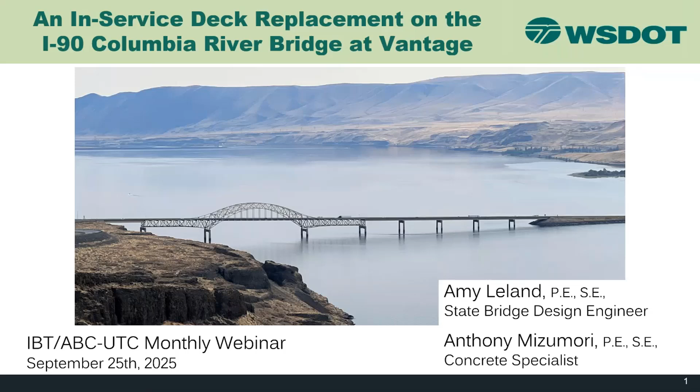Well, welcome. Thank you all for coming today. I appreciate it. I'm Amy Leland, as Kathy mentioned, and I am the State Bridge Design Engineer for Washington State Department of Transportation. I'm here along with Anthony Mizumori, who's one of our senior design engineers and our concrete specialist. We are here today to talk about this project, the Vantage River Bridge Deck Replacement Project.

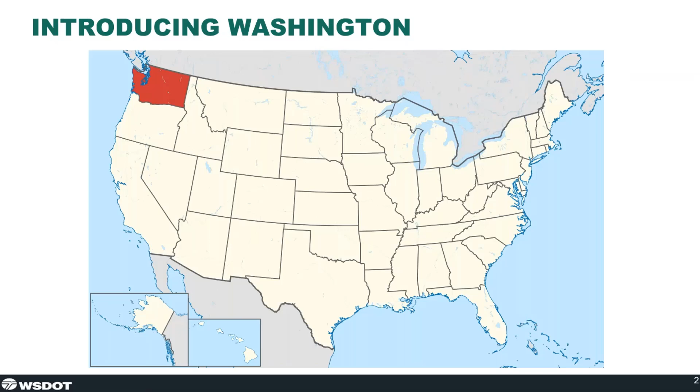So a little bit about Washington. Let's introduce Washington State. For those of you who do not know, we are located in the northwest corner of the continental US, as you can see here in red. For Washington State DOT, ourselves, we tend to design approximately 50% of our designs in-house. I know different states do it differently, but in Washington State, that's approximately our percentage that we do ourselves.

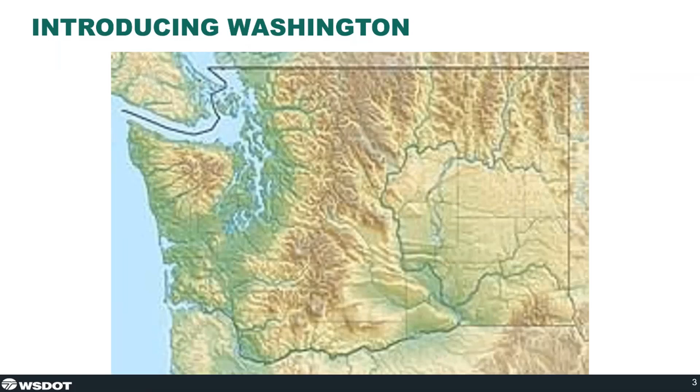Another figure of Washington State, this one you can kind of see some topography. What I want you to notice is that there is kind of a difference as you go from the west to the east part of the state. So here I drew in a little line and it kind of indicates the separation between west and eastern Washington. We have a lot more moisture on the west side, we have higher seismic on the west side, we have a lot more green on the west side. On the east side, it tends to be drier, a little bit more grassland and whatnot. So for those of us in Washington State, we tend to say we're from Western Washington or Eastern Washington.

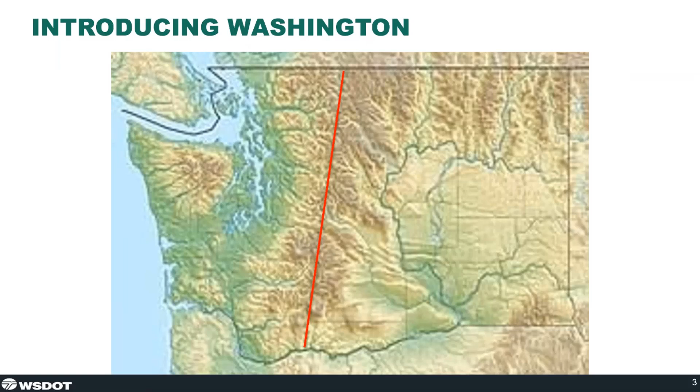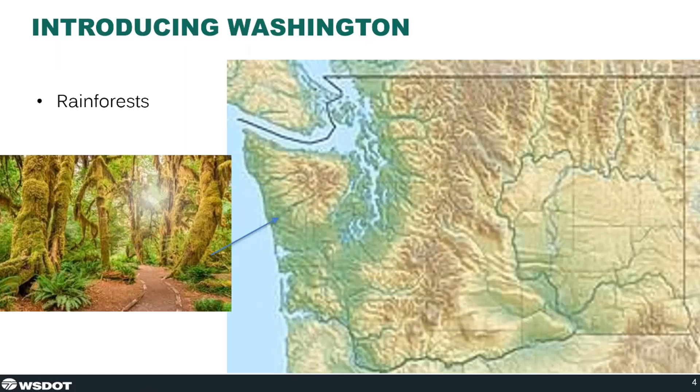Going more in depth in what we have, on the west side we have rainforest. You can see a picture here. We have a lot of moss on the trees. It's just a beautiful area. Then we have our mountains. We have a lot of mountains and mountain ranges.

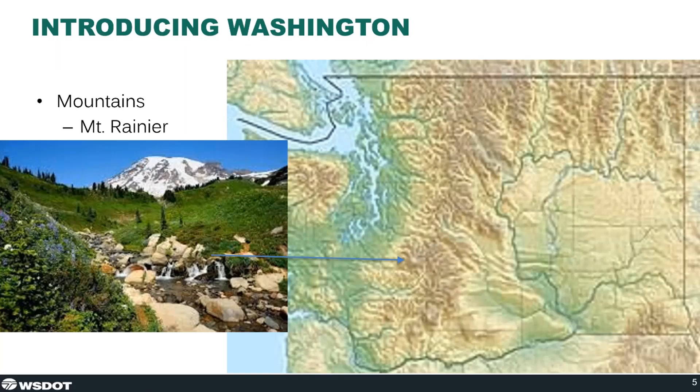On the east side of the state, we have a little bit drier arena. We have more farmlands, and we also have a lot of apple orchards. Washington is known for its apples.

Now let's get to the heart of this. We have bridges. In Washington state, there are approximately 7,700 bridges, and those are state-owned and local agency structures. 3,412 are owned by Washington State DOT. Our structures, we have 8.5% are in poor condition as of fiscal year 24.

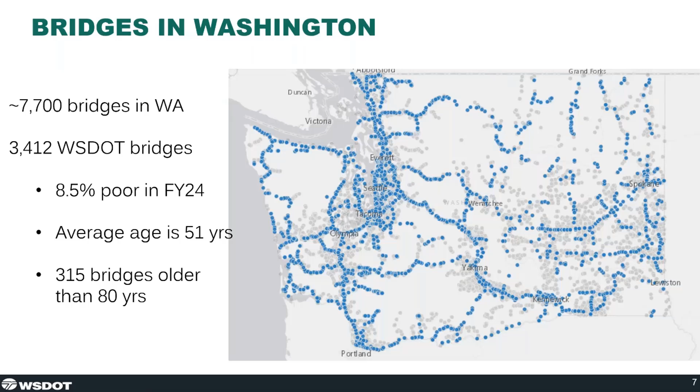The average age is 51 years. We have 315 bridges older than 80 years. I do want to point out that the bridge we are talking about is not in poor condition, it is in fair condition. Now let's talk about our bridge decks.

We have 72 of our bridges due for rehabilitation, meaning between 2 and 5% of the deck area is patched or spalled. We have 59 of our bridges past due, more than 5%, and 23 in contract for rehabilitation.

On the map to the right, you can see our main state routes, our corridors. Going from north to south is I-5, which extends all the way down into California. Going east-west, we have I-90, which starts in Seattle and goes all the way to the East Coast. The Vantage structure we're talking about today is near the middle of the state on our I-90 corridor, so it has a lot of traffic.

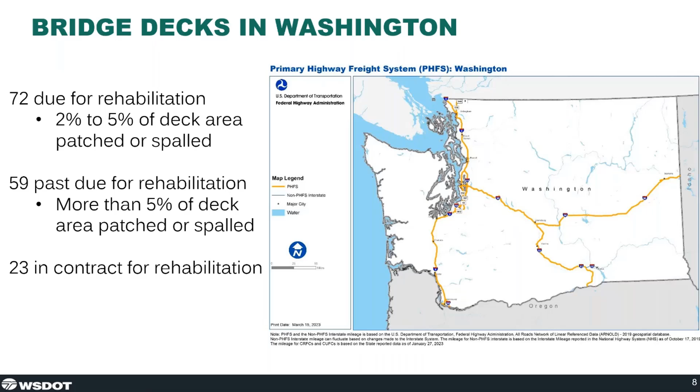Now I'm going to turn it over to Anthony so he can talk about the specifics on this particular project. Thanks, Amy. I'll get into the details of this deck replacement project, which is currently under construction. Here you can see the Columbia River Bridge at Vantage with a 520-foot tied arch main span and several plate girder approach spans off the side of this slide.

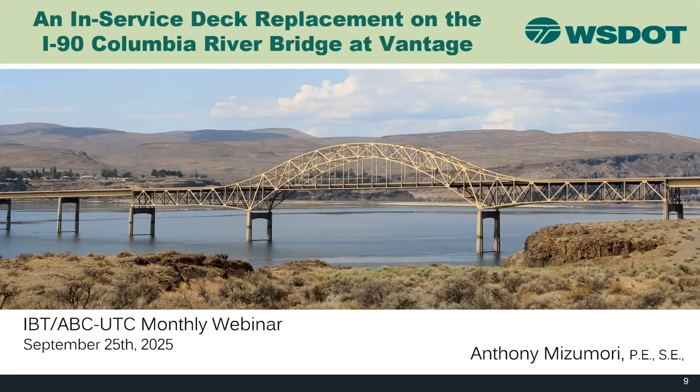So what I'm going to cover today is some of the history of the site and the bridge, as well as the existing conditions on the bridge deck. I'll talk about some of our project goals, and then go through several of the structural solutions that we developed along with construction photos.

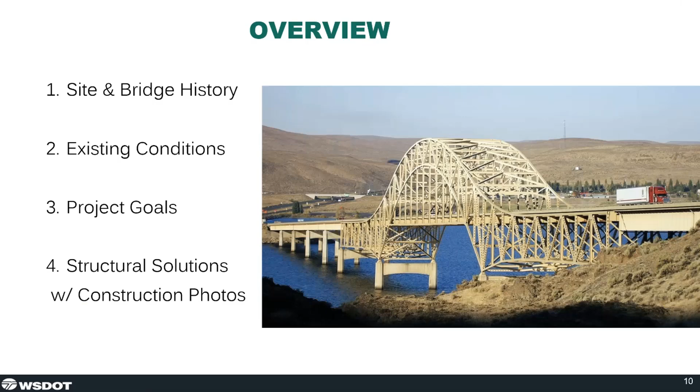The bridge location is circled here in the center of the state on I-90, as Amy mentioned. High ADT, very high truck percentages, and the two shortest detours at this location are both over 100 miles long. So it was not a good candidate for any sort of extended closure to lanes or the bridge entirely.

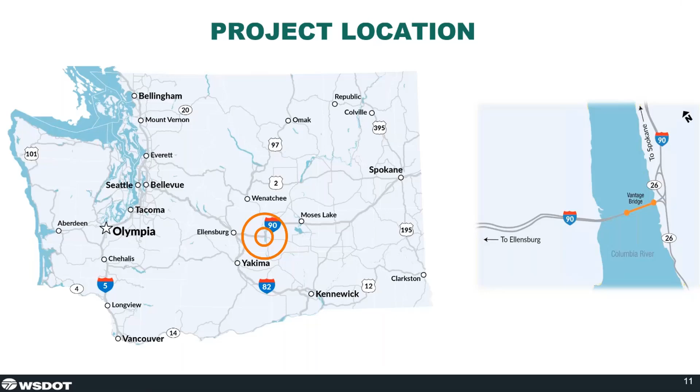Here are a couple photos from the first crossing at the site. In 1914, a ferry was put into service. It carried 2 cars, and it was quite dangerous. They learned quickly that you had to chain the wheels down to the deck in order to keep them on the ferry. 3 years later, in 1917, Washington State took over and operated this ferry.

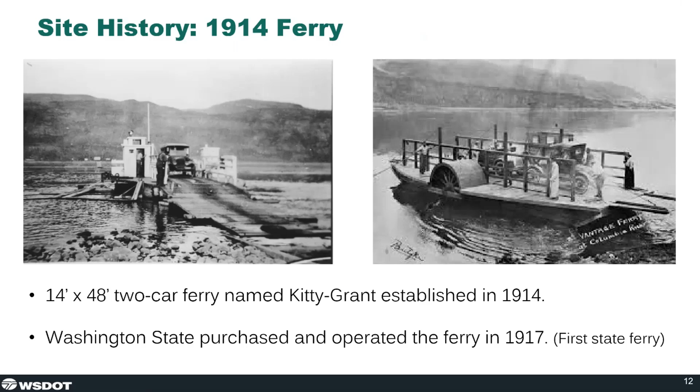So it was the first state ferry in Washington, and today Washington State owns and operates one of the largest ferry systems in the country. This photo shows the first bridge constructed at the site in 1927. It's a 2-lane bridge, 1,640-foot cantilever truss, and it was the 7th crossing over the Columbia River.

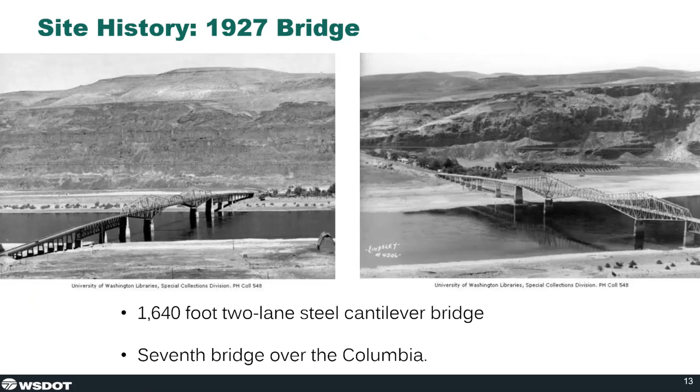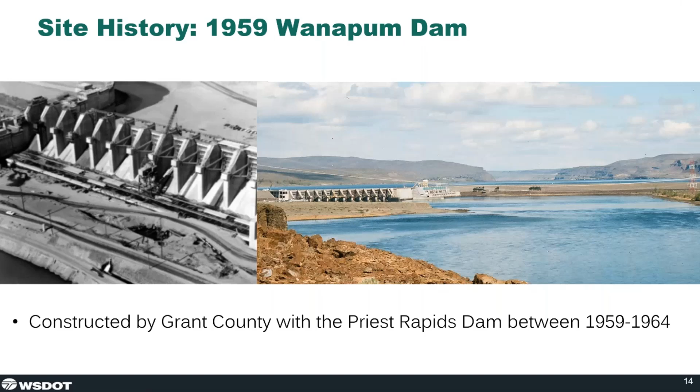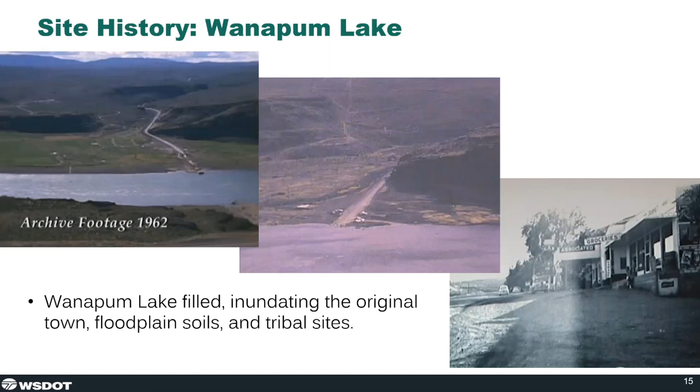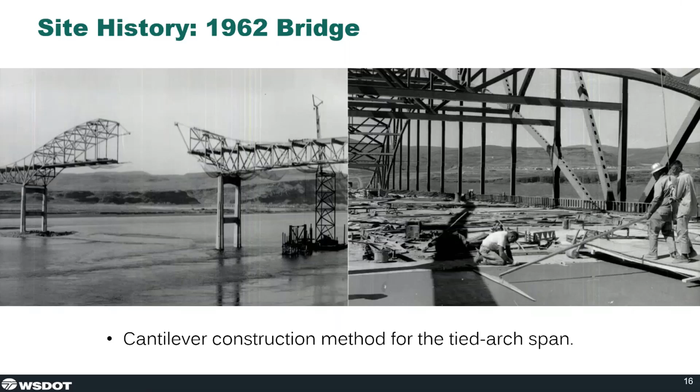The new bridge is under construction downstream, shown here in 1962. You can see the tied arch span being constructed using the cantilever construction method. The photo on the right shows some of the deck construction work on the cast in place deck. And here's a photo of the bridge shortly after it was completed.

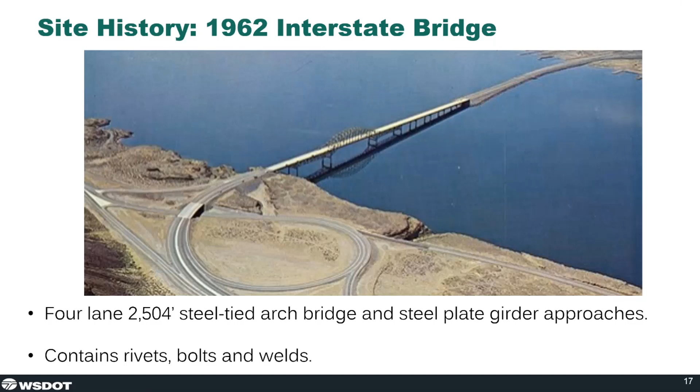This completed the east-west route on I-90 throughout the state during the interstate period. This bridge is 2,500 feet long, and it contains rivets, bolts, and welds. It was constructed in this era where all 3 were in use in the industry.

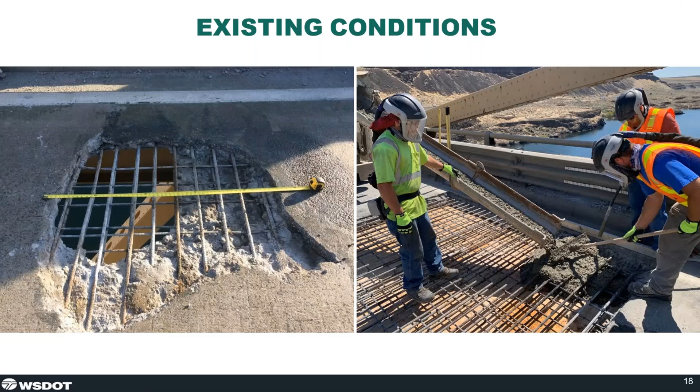So some of the key project challenges that we needed to address: one was, given the span lengths, structure deflections under traffic provided a lot of constraints to our design and construction methods.

Weather is also a concern here. We have high temperatures in the summer and cold, unworkable temperatures in the winter. And everywhere along the Columbia River Gorge, wind is an issue that could potentially shut down construction activities.

We also had ongoing bridge deck maintenance that needed to be performed alongside the deck replacement work. And this bridge is an emergency service route for communities on either side, so a full closure of the bridge was not a very viable option.

Lastly, given the construction delays predicted for this project, which were up in the 4-hour range at peak demands, there's an extensive effort to communicate traffic delays and impacts to motorists many miles away from this bridge so that they could properly plan their detours if needed.

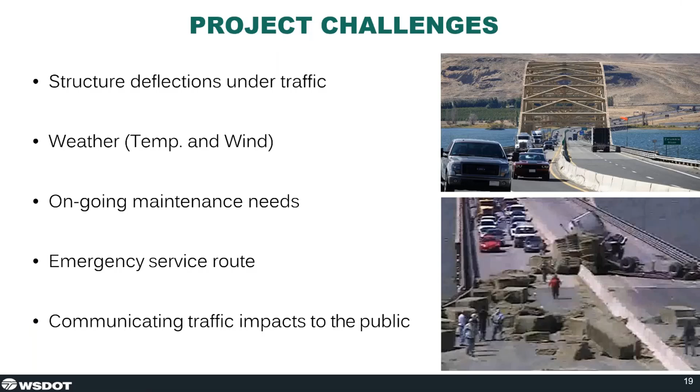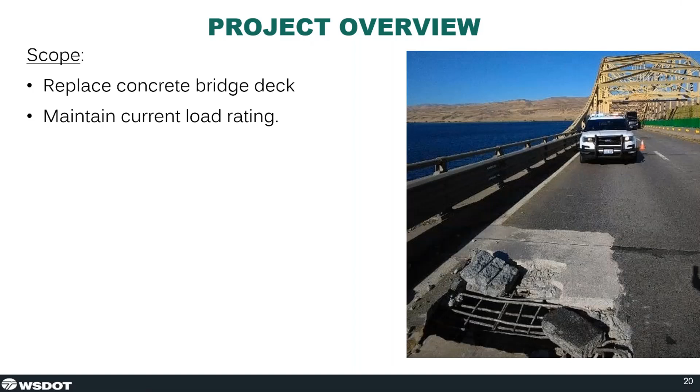The scope of this project specifically is to replace the existing cast-in-place concrete bridge deck with a precast concrete bridge deck. One of the requirements was that we maintain the current load rating to allow overload freight to continue to use this bridge, which we largely achieved by constructing a bridge deck that was slightly lighter than the current one.

Traffic staging was a big part of the challenge for this job. We were committed to maintaining one lane of traffic in each direction at all times throughout the deck replacement work, and additionally we needed to open the bridge to full traffic on 3 key holiday weekends during the summer and during the extended winter work shutdown.

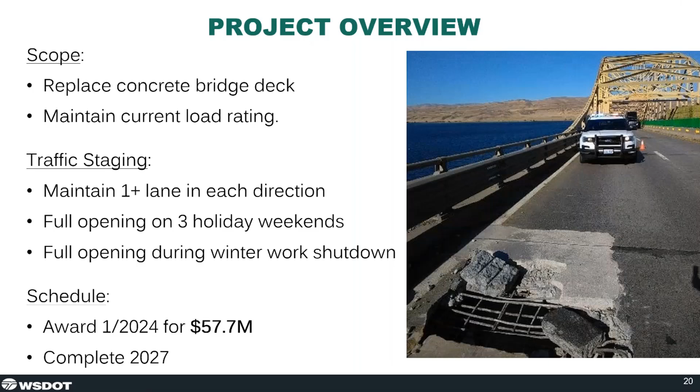This project was awarded in January of last year to Garco Construction for $57 million, and we're expected to be finished in mid to late '27.

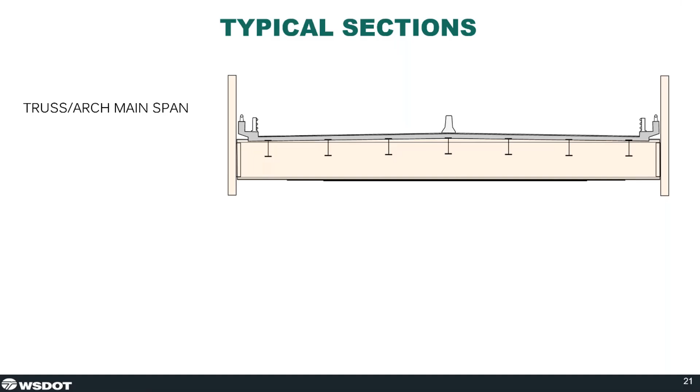Looking into the structure details a little, this section here is in the truss and arch spans. It's a pretty typical framed floor system structure with 7 stringer lines. The section on the bottom shows the steel plate girder approach spans, and these plate girders are spaced at 16.5 feet on center.

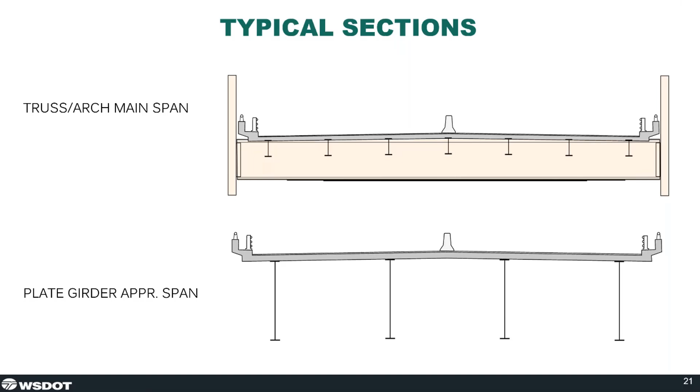When you combine that with the need to run a construction joint down the middle of the bridge, we had a lot of challenges supporting traffic and construction loading without overloading the existing deck. I want to point out that the existing deck is non-composite with the stringers and girders, and we oftentimes like to consider making deck replacements composite to boost the live load capacity, but we did opt to construct a non-composite deck in this case, given the complicated staging of the job, which I'll go through.

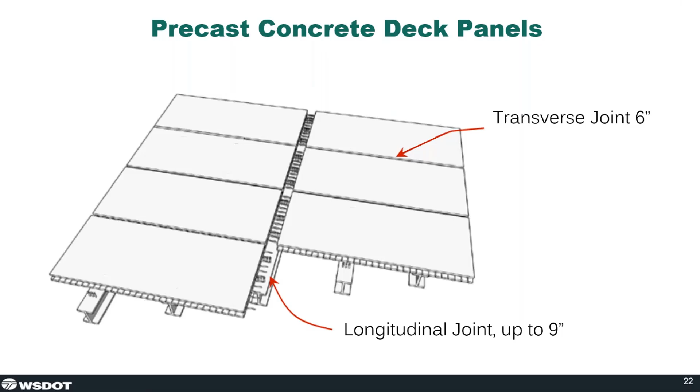So I'll step quickly here through the rest of the sequence.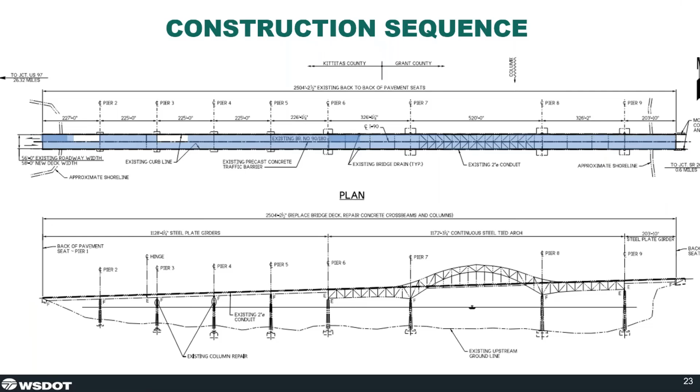You can get a sense of the number of traffic shifts required to accommodate the work in this fashion. Now if we look at a section view of the deck in one of these work zones, shown here is the existing condition where we have 4 lanes, 12 feet wide, 2 in each direction.

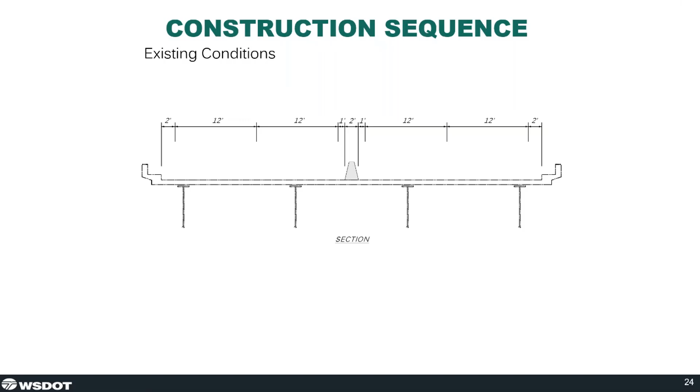The first step is to restripe the bridge with 10.5 foot lanes and slide those to the curb line as close as possible. Once that's done, we install a temporary steel floor system down the center bay between the girders to support the deck after saw cutting starts.

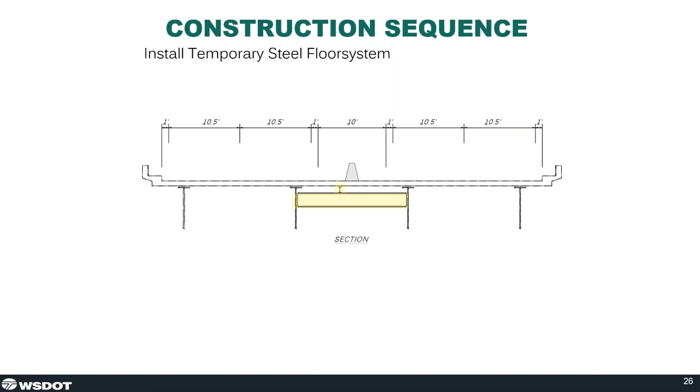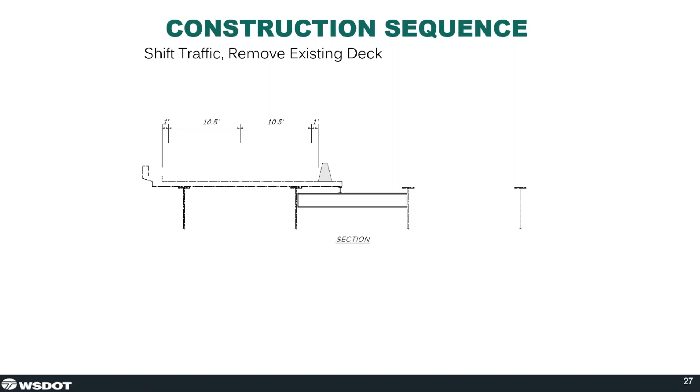Once this floor system is in place, we can shift traffic to one half of the bridge, so we have two 10.5-foot lanes of opposing traffic, undivided, and we can start removing portions of the deck on the right side, bringing in precast deck panels, which are also supported on a temporary floor system in the center bay.

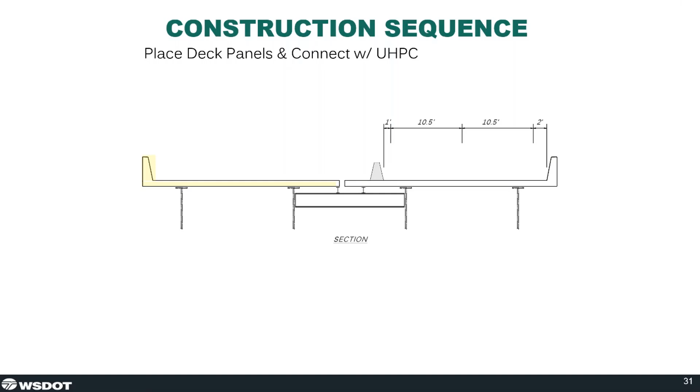So the haunches are grouted between the deck panels and beams, and UHPC closure pours are cast between these deck panels. Then we can move traffic to that side of the bridge, the right side, and commence with similar work to remove the deck panels, place a new deck, and then cast haunches and closure pours. Once this work has gained strength, we move to our third traffic configuration where we split lanes to provide a center work zone.

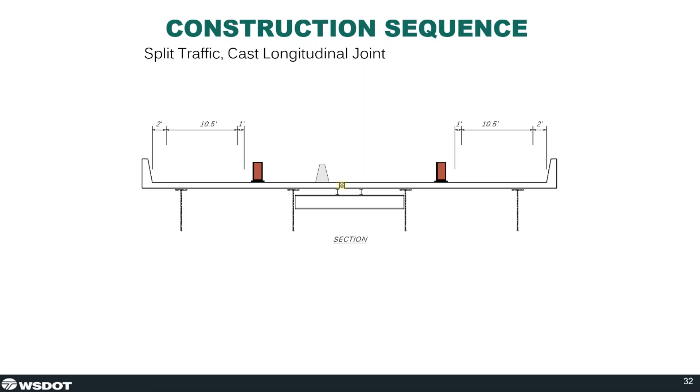This provides access to cast a longitudinal closure pour using ultra-high performance concrete down the middle. Once that gains strength, we have the option to open the bridge up to 4 lanes of traffic if required by the contract, or we can move on to the next work zone. It's at this point where the temporary floor system in the center bay could be removed by the contractor.

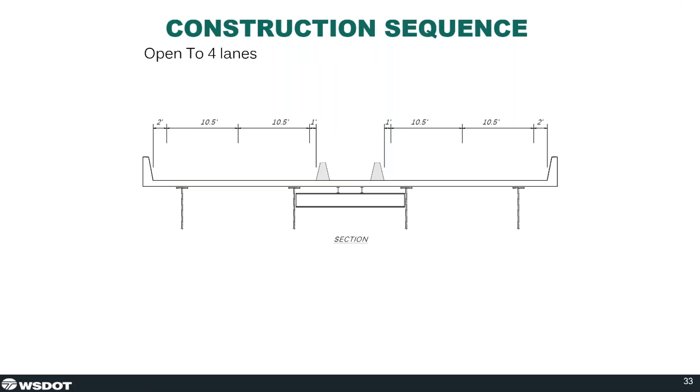But we had a pretty extensive analysis for construction load configurations in order to identify the sequence required in the plans, as well as construction equipment load limitations in the plans. It turns out that the cross frames were some of the more vulnerable elements that needed to be addressed during these temporary conditions when the deck was in a state of partial replacement.

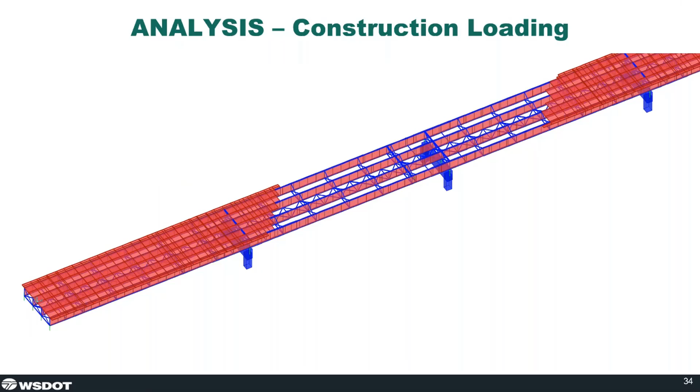That provided a reasonable bar spacing in the UHPC closures to provide reasonable fit up as well as efficient non-contact lap splices between the bars. You'll notice that the bar is galvanized as well. We had specified epoxy coated bar in the contract, but the contractor proposed a no-cost change to use continuously galvanized bar on this job, which we accepted. This is actually the first significant use of continuously galvanized bar for WSDOT.

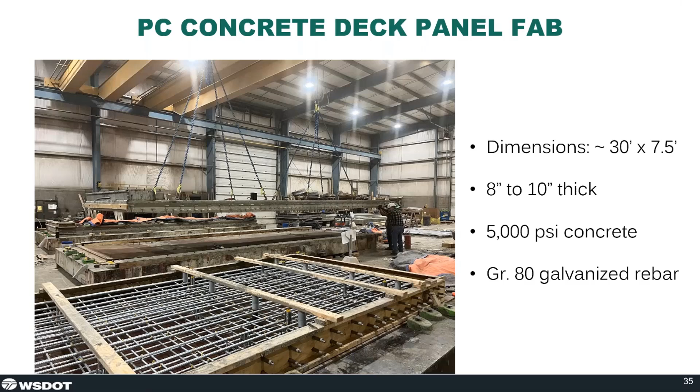Looking at the deck panel finishes, the 2 images shown here are mock-ups for the roughness provided, one by a wire brush and one by a broom. The final bridge deck will be ground and grooved to provide skid resistance, but some of the initial deck panels on this job will be in service for up to 3 years, so we needed skid resistance, and we opted for a wire brush finish shown on the top there.

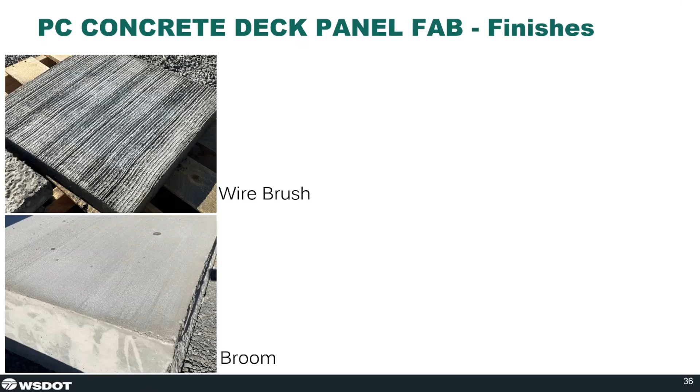This mock-up panel was used as the basis for acceptance of the production deck panels. Additional photos here show the exposed aggregate surface finish for the UHPC closure joints, and the bottom right shows a form liner finish which we applied to the soffits of the deck panels over girders and stringers to provide some mechanical roughness to promote bond, even though the deck is non-composite.

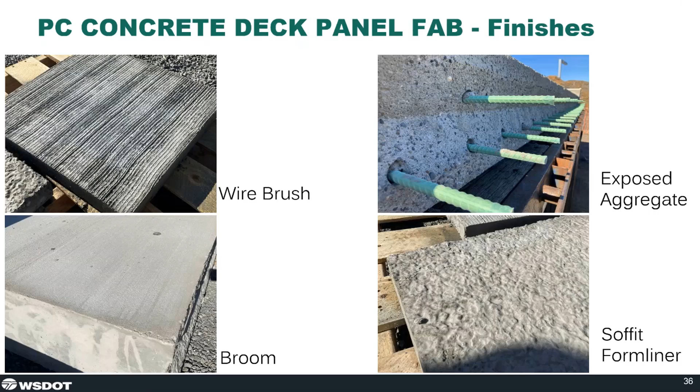Getting out on site here, these photos show the work access that the contractor installed to install structural steel floor system elements, as well as form and strip for the haunches and UHPC closures. We provided a 10 PSF allowance under contract for this work access system, and the contractor was able to install this in any permutation they wanted to perform the work, including the full length of the structure.

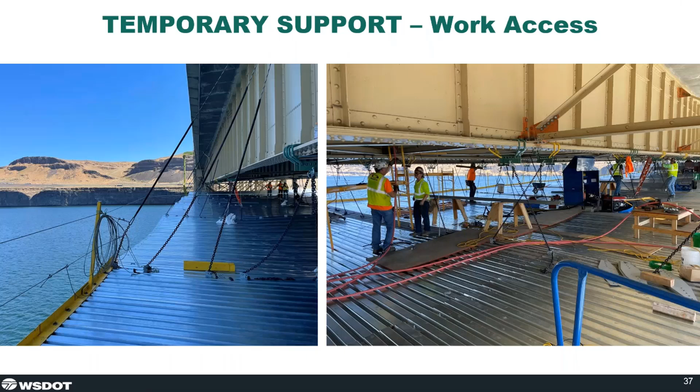Now onto cross frames.

The original cross frames were just sized as secondary members, so they had a risk of being overloaded during construction. The photo on the left shows a typical strengthening we did where we replaced the riveted connections with high strength bolts. That was done on most of the cross frames on this bridge.

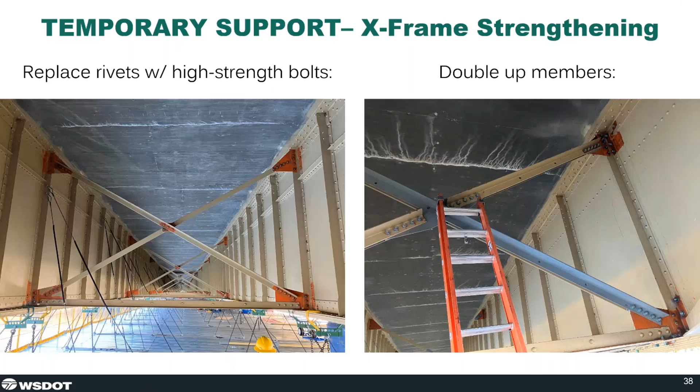The photo on the right shows more extensive strengthening down the center bay at key cross frames, where we converted single angle members to symmetric double angle members.

This photo shows the temporary steel floor system in the center bay of the girder spans. The stringers run left to right, and they support the cantilevered edges of new and existing deck panels when they're unsupported. These stringers are supported on transverse floor beams, which are bolted directly to the existing transverse stiffeners of the girders. It's this floor system which allowed us to support 2 lanes of traffic as well as significant construction loads on the bridge at the same time.

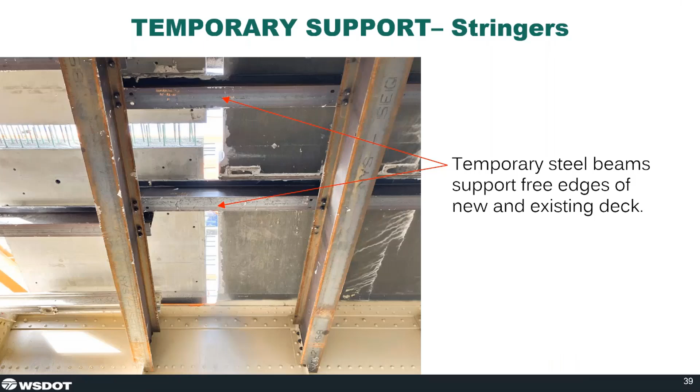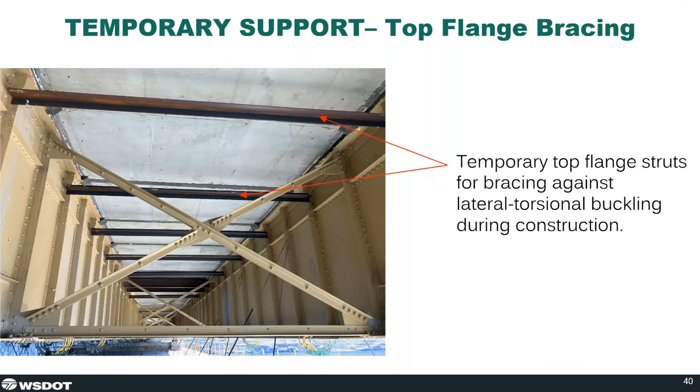Typically a transverse strut alone is not sufficient to resist lateral torsional buckling, but because during this work we always have at least 2 of the 4 girders fully braced by a deck panel, whether it's new or existing, these simple braces function as lean-on bracing to provide resistance against buckling for the system of girders. They're much more economical than a full cross-frame installation.

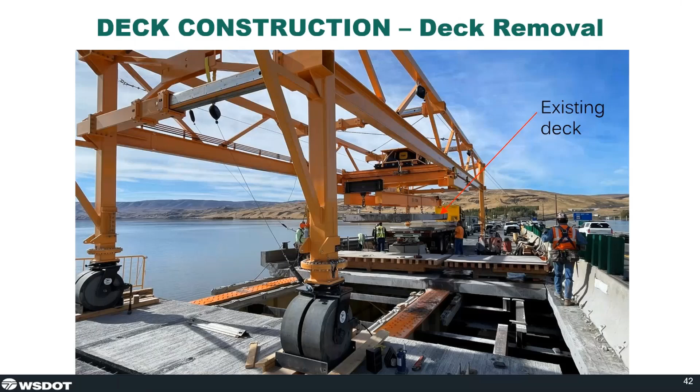This photo shows a half-width section of the existing deck being picked out of place and loaded onto a flatbed truck using this large gantry system used to perform the work. You'll see the 2 existing girders in place, as well as some of the temporary stringers on the lower right side of this view. A little bit about deck panel removal.

The original deck was non-composite, so no shear studs. The plan was to pick out portions of the deck in fairly large segments as shown in the previous slide. However, during some of the early work, the contractor was finding that these panels couldn't be picked. So they had to do a fair amount of chipping over girder flanges to free them and cut the deck panel into much smaller segments. This initially seemed to jeopardize the project schedule as a whole.

What we discovered was that this restraint was not coming from shear studs, but as you see in these photos, there are deck soffit form hangers that straddle the beams. It turns out that some of these were occasionally tack welded into place during initial construction. Once we figured that out, the contractor was able to come up with a way to locally jack at points of restraint when lifting deck panels and pop the tack welds with a very low level of force. This allowed us to maintain the schedule and plan to lift out deck panels in pretty large sections.

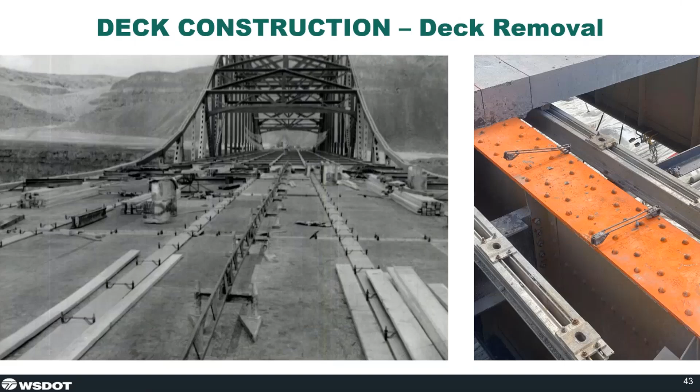This gantry was custom built for the job, and in fact there were 2 of them because we have 2 independent work zones operating at any given time. The weight of the gantry, the flatbed truck, and a panel in transit was right around the construction equipment load limit that we had developed and put in the plan, so they took full advantage of that allowance. You'll also see here that this gantry has telescoping members transversely at the ends, so the width of the gantry could be adjusted.

So when they're mobilizing this gantry on and off the bridge, it's in a narrower configuration to fit within the lane. And when it's operating on the bridge deck, this adjustment allows the solid rubber tires to be located directly on top of existing girders or stringers, depending on which span they're working in. This avoided inducing large bending forces into the new deck panels when it's traveling over new deck panels, so there was no need to provide any sort of pre-stressing in these panels for temporary load configurations.

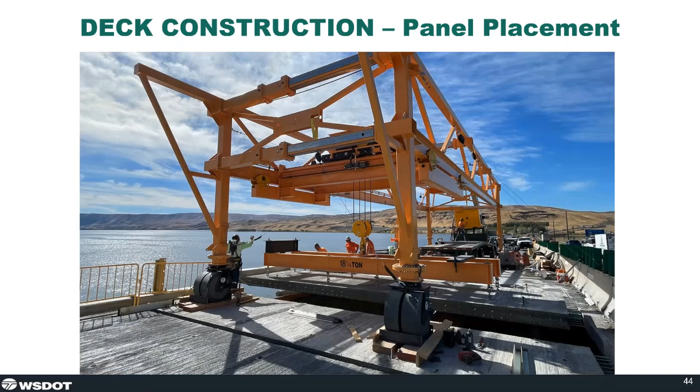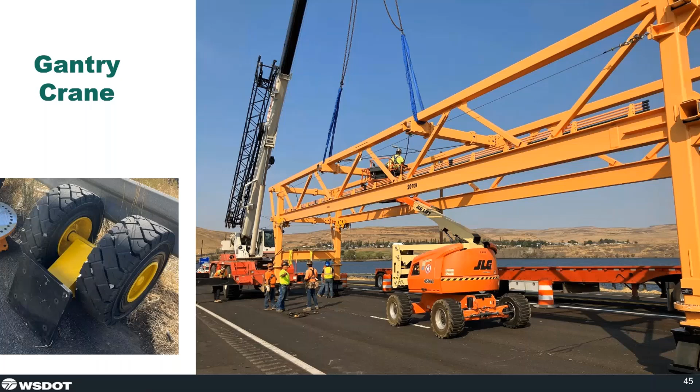This photo here shows the gantry system being mobilized at a bridge end. When it's operating, the gantry is supported on solid rubber tires that are shown installed here, but the photo on the bottom left shows the rubber tire system that was swapped in and out when they're mobilizing the gantry up and down the approach roadways.

A little bit more about construction load limits, because we did all the construction engineering globally during design, and the diagram here shows the construction equipment load that was put into the plans. It's a 2-axle, 2-wheel line load at 100 kips total. The contractor was allowed to use any configuration of equipment as long as the load effects created an envelope less than this notional load that we provided.

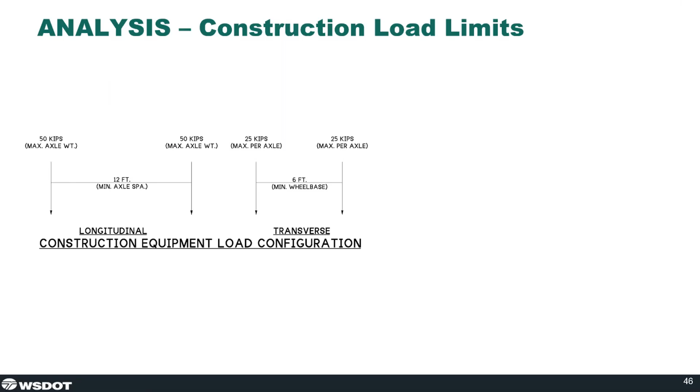In addition to that, we had some requirements that only one panel be removed at a time to avoid unbalanced dead load configuration. We did allow them to work 2 separate work zones as long as all the equipment was separated by at least 225 feet to avoid excessive interaction between the load effects. And as I mentioned earlier, they were allowed an additional 10 PSF of load for access below.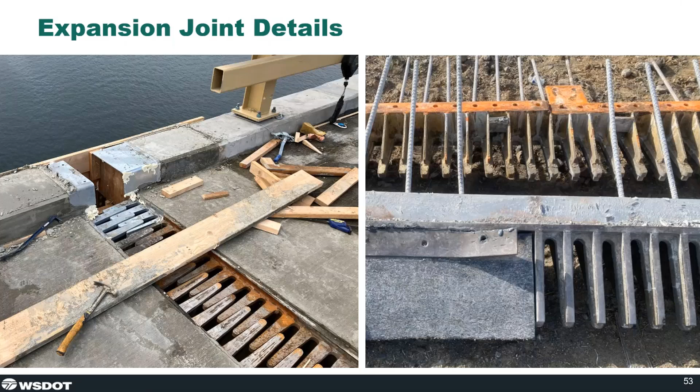We did have to extend the finger joint system slightly to account for the new curb system, and we had to shim these finger joints up a little bit higher than they were originally sitting because the new deck panels sit higher than the existing deck. We had to do that to provide enough space to reliably cast the girder haunch grout underneath the deck panels.

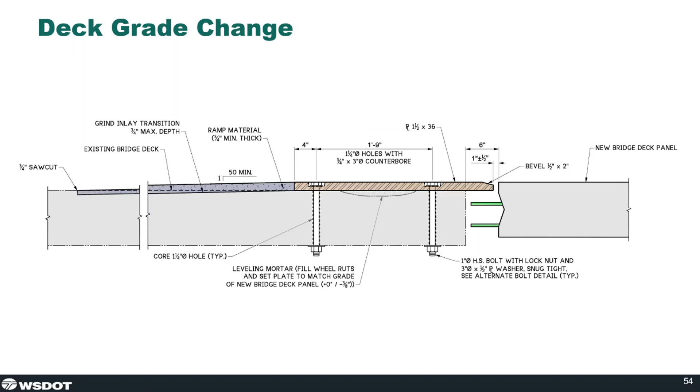This graphic shows how we addressed the grade difference at joints between the existing deck and the new deck. The new deck is shown on the right. So we have a bolted steel plate that spans the 6-inch gap and protects the extended rebar from the new deck panel, and then there's a pavement wedge to ramp up to this plate on the existing deck.

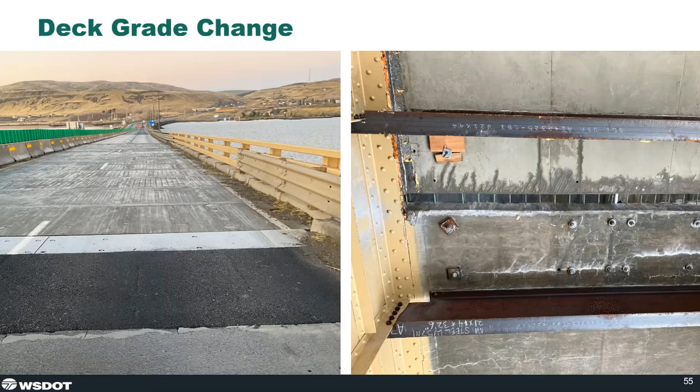So we opted to install a second cover plate over the top of this and replace the rivets with high strength bolts. This plate only ran half the length of the floor beam because that's all we had access to. Then when we moved to the other half of the bridge, we installed a similar cover plate and connected those two cover plates using a partial joint penetration weld out at the mid-span of the floor beam itself. So far, the rest of the floor beams and the girders were generally in good condition, and oftentimes the red lead primer paint was fully intact.

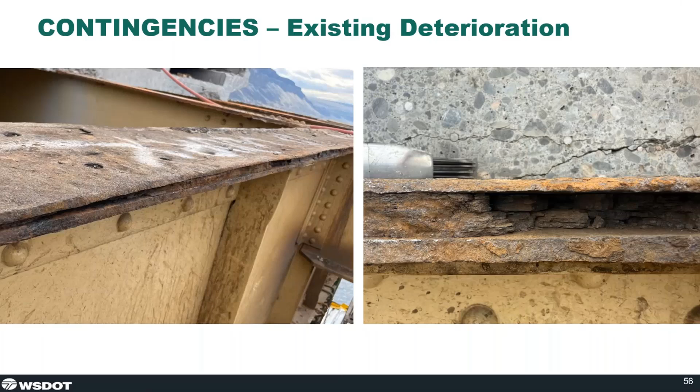So our solution was to come in from the side with a cutting wheel to make a curve cut to sever the slot weld between the two plates, and hopefully improve the fatigue performance of this repair.

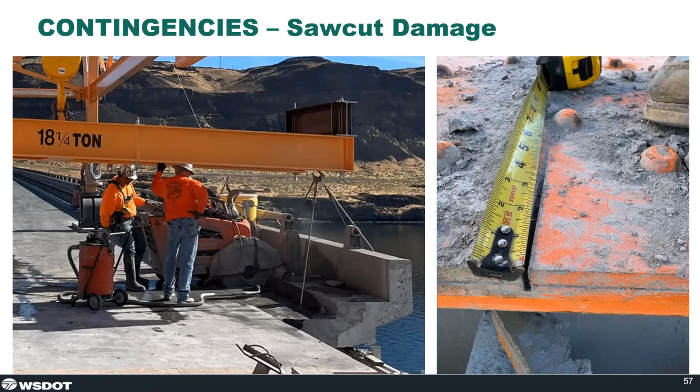Some of the lessons learned that I can share. One is that UHPC can be placed and cured when exposed to modest vibration. This was one of the biggest risks going into the site, because most of the literature will tell you not to expose UHPC to any vibration. But the suppliers will acknowledge that this material has been placed when there is vibration present. We did our best to limit the vibration in these joints given the traffic requirements for the bridge.

Second, large construction load allowances can be combined with active traffic as long as responsibilities are clearly specified and adequate time is given during the bid period. We did a fair amount of construction engineering, but in order for bidders to provide an economical bid, they needed time to run some bid level construction engineering of their own, to size the equipment and schedule out the work. We did delay the bid period once for that reason, but we also benefited from some additional bid opening delays tied to administrative issues with the state and the project budget. I think that was key towards getting economical bids. There were some bids quite a bit higher than the low bidder, and I suspect it's because they weren't able to perform enough bid level engineering analysis to optimize their schedule.

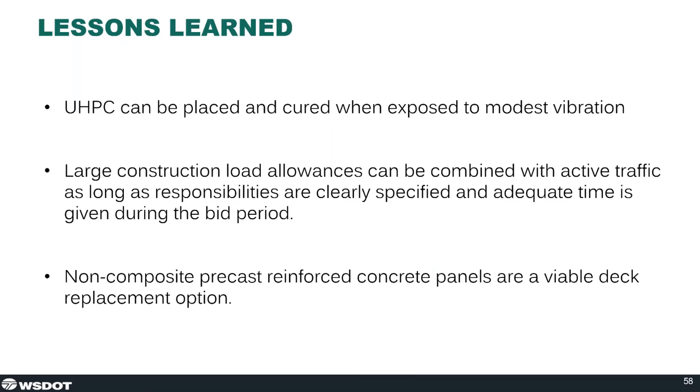And lastly, non-composite precast reinforced concrete panels are a viable deck replacement option. That's not something WSDOT has done regularly, and there's not a lot of literature out there for that. It'd only be recommended if you're replacing a deck that is already non-composite. And with that, I'll open it up to any questions.